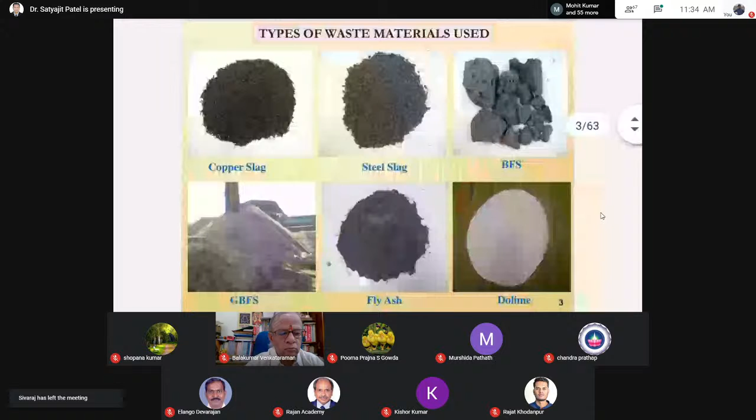The first one is copper slag. Copper slag is a byproduct from the copper industry, generated when copper ore is refined to copper metal. So in that copper industry you get the slag material. Whenever there is a process from mineral ore to metal, there will always be some slag. Similarly, steel slag is an electric arc furnace slag. The copper slag is procured from Birla Copper at Dahej in Gujarat, and the steel slag is procured from Essar Steel in Hazira, Surat.

In steel slag, there are two types of slag available in steel plants. One is, in the first step, it produces blast furnace slag, BFS. When iron ore is converted into molten iron, in that step blast furnace slag is produced. Blast furnace slag can be of large size, like 40-50 mm or up to 80 mm also.

GBFS is granulated blast furnace slag. During the formation of blast furnace slag, it is pulverized into small pieces with the help of a high pressure water jet. Due to that, the large particles of blast furnace slag pulverize into smaller particles during formation, which is called granulated blast furnace slag, GBFS, of sand size similar to that of sand. The chemical composition is the same; only the physical characteristics differ between BFS and GBFS.

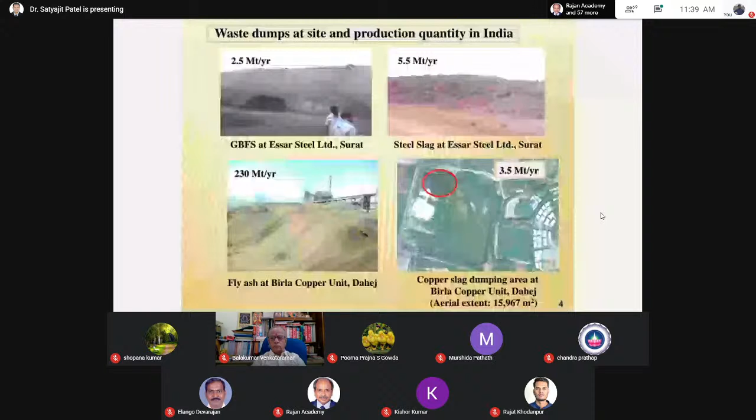The combination of waste materials studied here for the sub-base course: copper slag with fly ash as filler - that is copper slag fly ash mix; then GBFS with fly ash as filler - GBFS and fly ash mix; then fly ash stabilized with dolime, or you can stabilize with lime; then black cotton soil stabilized with dolime. These four materials can be selected as sub-base material.

For the base course: copper slag with fly ash filler stabilized with dolime; fine steel slag with fly ash filler stabilized with dolime; coarse steel slag with fly ash and dolime; blast furnace slag with fly ash and dolime. These four materials have been selected as the base material.

So what is the difference between these two compositions? For sub-base, there are only two raw materials - one is the slag, your hard material, and the other is the filler or binder. But for the base course, there are three materials: the strong hard material like slag, then filler like fly ash as a pozzolanic material, and binder as dolime.

For base material, we need higher strength, higher compressive strength, or higher CBR value for the road pavement, and for sub-base we need low strength. So accordingly, the material has been selected to fulfill the requirement of base as well as sub-base material.

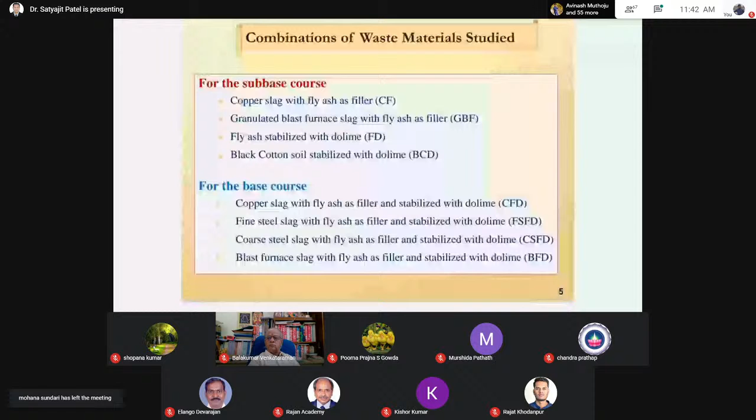The objective is technical competence - whether these materials are feasible and their strength fulfills the requirement as per IRC code for use in road pavement - and sustainability, from an economic point of view, based on the quantity of waste material to be used, how it is sustainable.

Then a pavement model test has been carried out, followed by finite element analysis using Plaxis 3D for the road pavements. Then design to find out the equivalent thickness of this material - how much thickness you have to take which is equivalent to conventional stone aggregate.

So as per IRC code recommendations, you need 250 mm of wet mix macadam for the base layer, and around 330 to 350 mm of sub-base layer for CBR equal to 3% and traffic of 100 MSA. So the question is how much thickness of waste material, that is stabilized material, is equivalent to 250 mm WMM, or how much thickness of sub-base material consisting of waste material is equivalent to 350 mm of GSB.

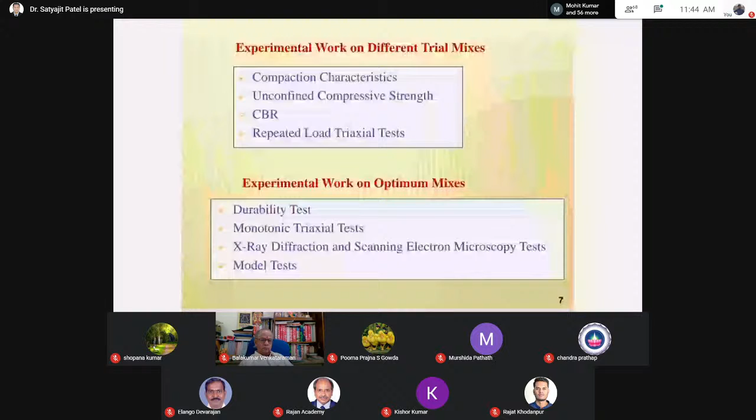Then experimental work was carried out, starting with the basic heavy compaction test. Then unconfined compressive strength test, as this is a cemented base and cemented sub-base material, so UCS is always preferable and convenient to compare the various mixes, curing periods, and so on. It is easy to prepare the specimen and conduct a large number of UCS tests. Then CBR has been carried out only for sub-base material, because only for sub-base material do you need the CBR value to check its feasibility. UCS is useful for any cemented material, whether for sub-base, base, or anything else.

Then repeated load triaxial test, or cyclic triaxial test, was carried out to find out the resilient modulus and permanent deformation of the various mixes. Based on these four tests, the optimum mix was selected, and on the optimum mix, durability tests were carried out, that is wetting-drying cycles. Then monotonic triaxial test was done to find out cohesion and angle of friction, useful for numerical analysis in Plaxis.

Then X-ray diffraction and scanning electron microscope tests were carried out to study its microstructural behavior. Then a pavement model test was also carried out.

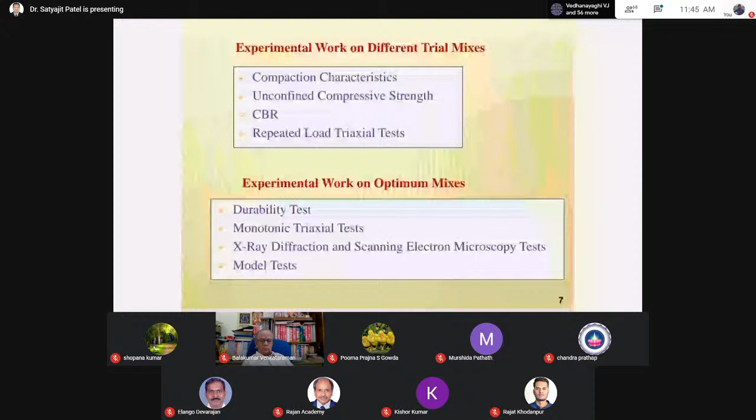So, the different trial mixes adopted for sub-base material: what is the mix proportion adopted for the research investigation. That is the copper slag fly ash mix, where copper slag was replaced by different percentages of fly ash, ranging from 10 to 40% of fly ash by weight.

Then the GBFS fly ash mix, where GBFS, that is granulated blast furnace slag, was replaced by different percentages, that is 100%, 90%, 80%, 70%, 60% of fly ash by weight. As GBFS is a costly material, it has some value-added product status because it is largely used in cement plants.

So GBFS will not be available to you free of cost; it has some value. That's why effort has been made to minimize the use of GBFS. So the replacement means only fly ash, then 90%, 80%, 70%, 60% replacement of GBFS with fly ash.

Then the fly ash dolime mix, fly ash with different percentages of dolime, say 5, 10, 15, 20% dolime. If you use lime instead, in the fly ash lime mix, you can take 3, 6, 9, 12% of lime, because lime contains calcium oxide of around 70-80%. In case of dolime, you need a higher percentage due to its impure quality.

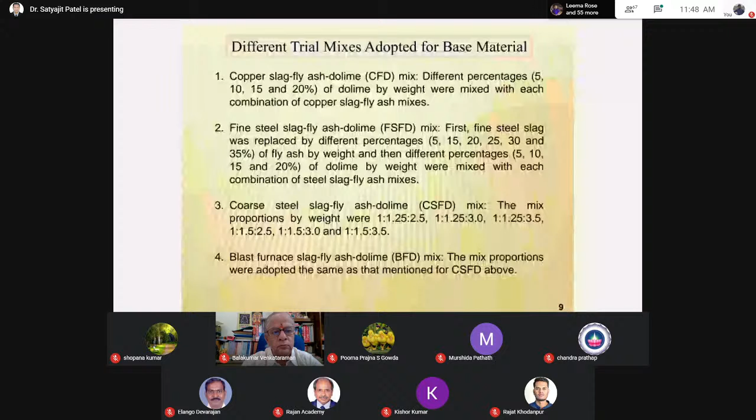Similarly, for steel slag, fly ash has been added or replaced at 5, 15, 20, 25, 30 and 35% to fine steel slag. Then different percentages of dolime, 5, 10, 15, 20%, have been added.

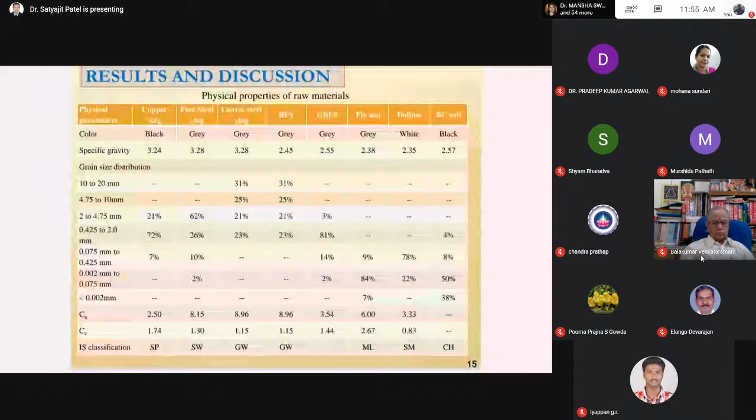Similarly, for coarse material, properties like specific gravity and grain size are easily determined in the laboratory. Copper slag is material passing through 4.75 mm, so it is always less than 4.75 mm. For coarse steel slag and blast furnace slag, particle size up to 20 mm is used in this laboratory test, because in the laboratory you cannot prepare a cylindrical specimen for particle size more than 20 mm - you need a minimum diameter to particle size ratio of 5. But in the field, blast furnace slag and steel slag can be obtained up to 300 mm or 500 mm diameter, very large sizes that need to be crushed down into smaller ones.

If you compare with the requirement of IRC, for a cemented material to be used in the base layer, IRC recommends a minimum UCS value of around 4.5 MPa. Minimum 4.5 MPa UCS value should be there in the laboratory, 4.5 to 5 MPa should be there.

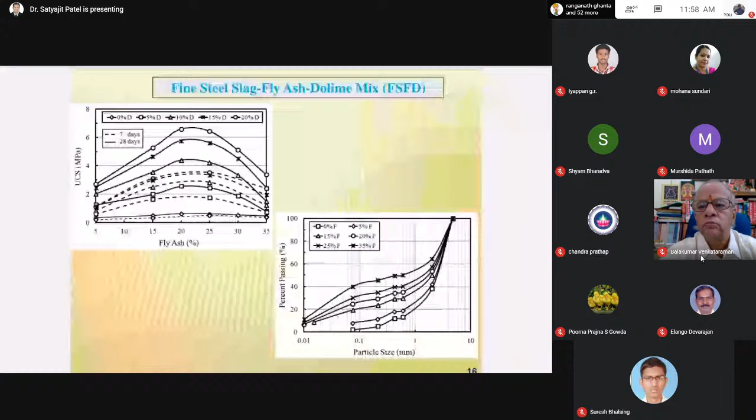Geotechnical inputs for pavement design. What are the various parameters you need for a proper pavement design?

The first one is resilient modulus. What is resilient modulus? The elastic modulus of a material, the simple Young's elastic modulus, which we find out from the triaxial test, the monotonic triaxial test in the laboratory. The elastic modulus of a material is the stress divided by strain for a slowly applied load, whereas resilient modulus is the stress divided by strain for a rapidly applied load, such as those which actually occur in pavement.

In road pavement, there is no static load or monotonic load. All the load from vehicle movements will be repeated in nature, or you can call it cyclic load or repeated load at different frequency. So Young's elastic modulus is stress by strain for a monotonic load, but resilient modulus is the same thing, stress by strain for repeated load.

So CBR test, plate load test, UCS test, static triaxial test, all these tests determine the behavior of pavement material under slowly applied load or monotonic load conditions only, which is unable to simulate field conditions properly, because in the field there is no monotonic load, there is repeated load. So resilient modulus and permanent deformations are two important material properties for characterization of pavement material and design of the pavement structure.

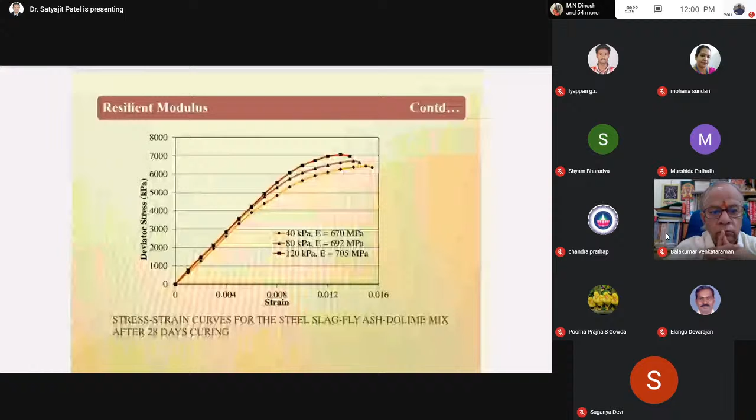When there are a number of repeated loads, you will get the resilient modulus for each load cycle. It is defined as the ratio of cyclic axial stress to the recoverable resilient strain in a repeated dynamic loading. The permanent strain is an indicator of the rutting potential of the material.

For a material, if the permanent strain or permanent deformation is more, its rutting potential will be more. So there is a major chance for that material to fail by rutting.

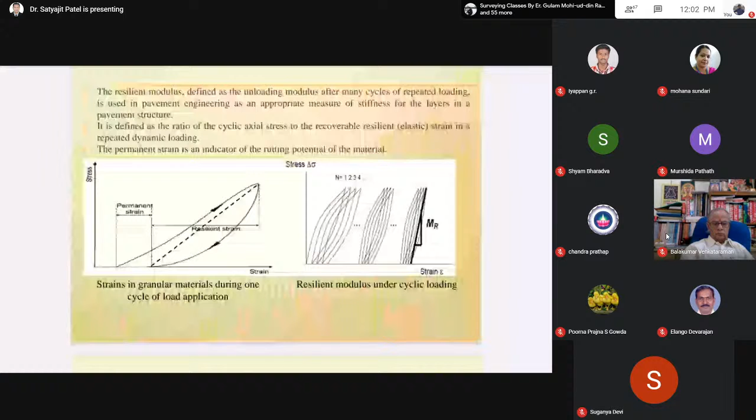Both resilient modulus and elastic modulus are measures of stiffness of the material, but elastic modulus is useful for monotonic load, while resilient modulus gives the stiffness under repeated loading condition. This resilient modulus is very useful while designing the pavement using mechanistic empirical pavement design or IIT PAVE analysis. So instead of elastic modulus, it is better to use resilient modulus for pavement design.

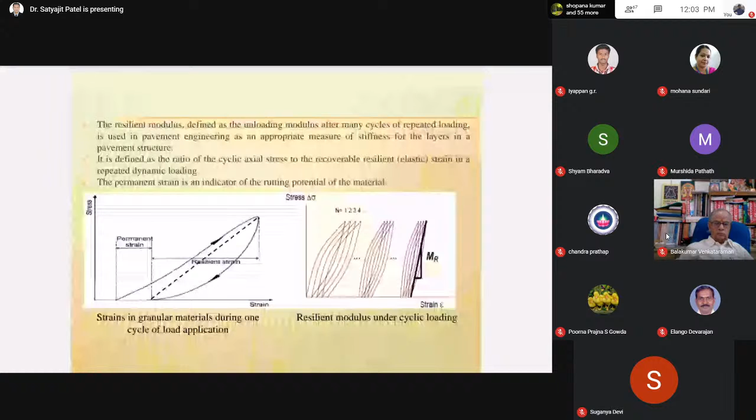It is desirable that resilient modulus and permanent strain of pavement material be determined by conducting a repeated triaxial test, but most organizations in India do not have the necessary facilities to conduct this test. In absence of testing facility, many state agencies and pavement designers use available empirical models to estimate or predict the resilient modulus and permanent strain.

There are many empirical equations available to predict resilient modulus using the CBR value, which is available in some IRC codes also.

The resilient modulus of a material is a stress-dependent measure of the elastic modulus. It is a function of both confining pressure and deviator stress, whereas elastic modulus is a function of confining pressure only. In case of Young's elastic modulus, for a given material and given confining pressure, it is constant. But resilient modulus depends on both sigma 3 and sigma d value.

With changing deviator stress or load applied on the specimen, the resilient modulus is different for different deviator stress. So it is not a constant quantity for a given material and a given confining pressure. This is a major difference between resilient modulus and elastic modulus.

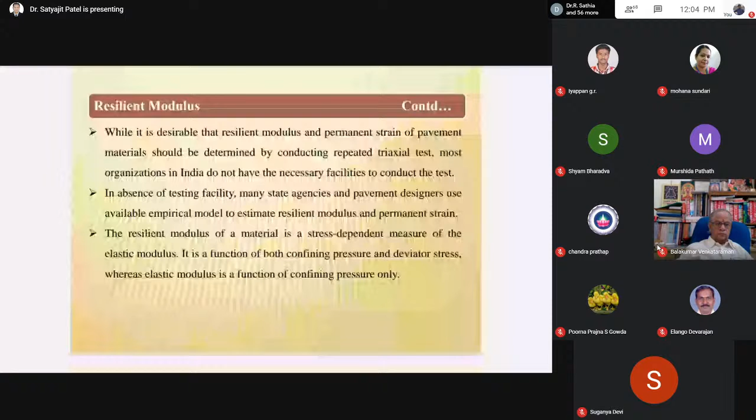There are so many correlations which, after carrying out the cyclic triaxial test, you can use to correlate the resilient modulus with different cell pressure and bulk stress, deviator stress. All these things I will explain after this table.

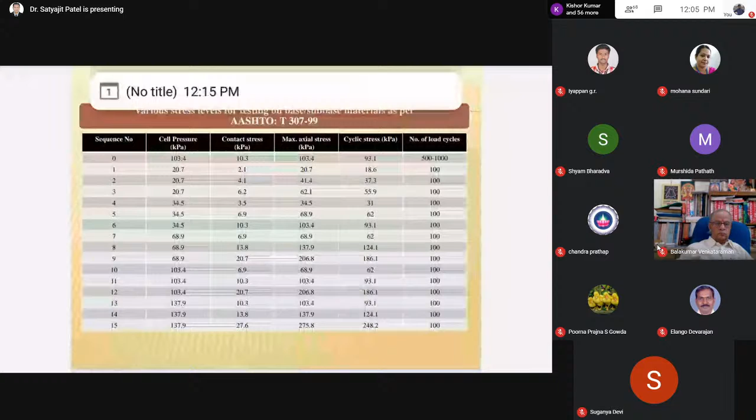The AASHTO T307 code recommends the test procedure for the resilient modulus test, how to obtain it or how to carry out this test. There are two such tables: one table is for base and subbase material, the other table is for subgrade material.

In this table, at sequence number 0, that is stress level number 0, then stress level sequence number 1 to 15. At sequence number 0, the cell pressure is 103, then contact stress, maximum stress and cyclic stress, where maximum stress minus contact stress is the cyclic deviator stress. This is the stress combination recommended by AASHTO to be applied for base and subbase material during the resilient modulus test.

At these 15 different stress combinations, you will get the resilient modulus value. As resilient modulus depends upon sigma 3 and sigma d value, for different combinations of sigma 3 and sigma d, we find the resilient modulus value.

The first stress level, sequence number 0, is called the conditioning phase, to stabilize the specimen or bring it to conditioning. At this cell pressure and deviator stress, around 500 to 1000 loading cycles are applied in the conditioning phase, after which the specimen gets stabilized, meaning its behavior becomes independent of the number of cycles.

It attains the resilient behavior. So after completion of this conditioning phase, or sequence number 0,

then we have to apply these 15 different combinations of stress levels from 1 to 15. So see the 15 different stress combinations. For the first 1 to 3, sigma 3 is constant with different deviator stress changing from 18, 37, 55.

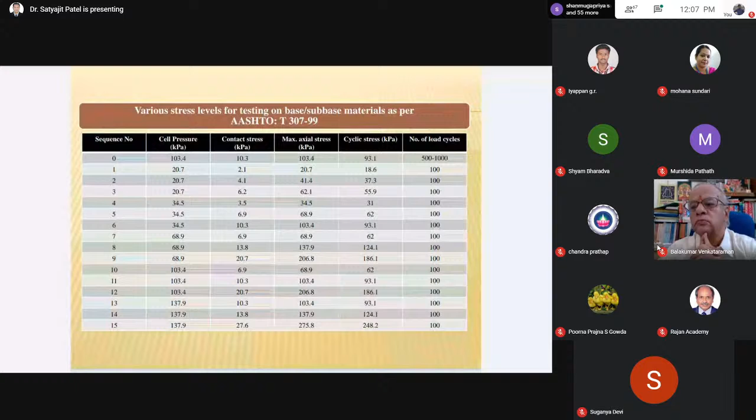for each stress level we have to apply 100 number of load cycles, to get the resilient modulus for different stress combinations. So from this test, during the conditioning phase, we will get the permanent strain behavior, and in stress levels 1 to 15, we will get the resilient modulus value for 15 different combinations.

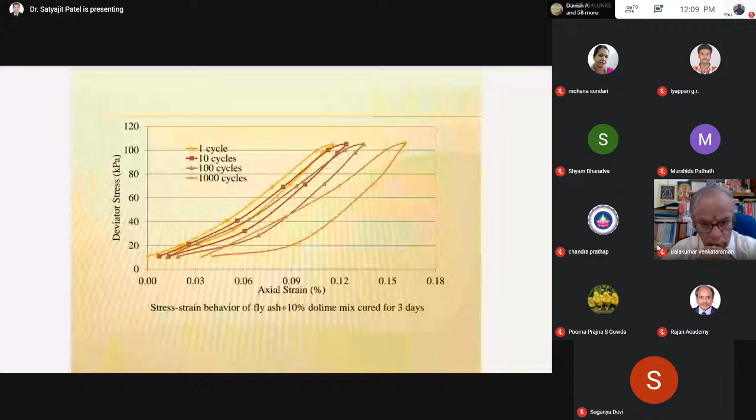So with increasing number of cycles, the permanent strain is increasing. See here, with increasing number of cycles, the permanent strain is increasing. Say after 1000 cycles, the axial strain is around how much? Around 0.04. So after 1000 cycles, you will obtain the axial strain or permanent strain as 0.04.

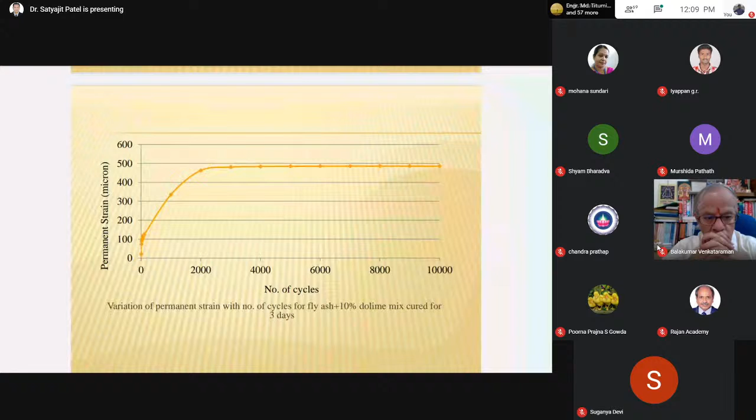So similarly, if you plot the permanent strain with number of cycles, initially it increases very rapidly. After the 1000 or 2000 loading cycles, depending upon the type of material, the permanent strain gets stabilized. This figure can be obtained in sequence number 0, or the conditioning phase, during the test. So after the permanent strain gets stabilized, up to that point you have to apply the cyclic load in the conditioning phase.

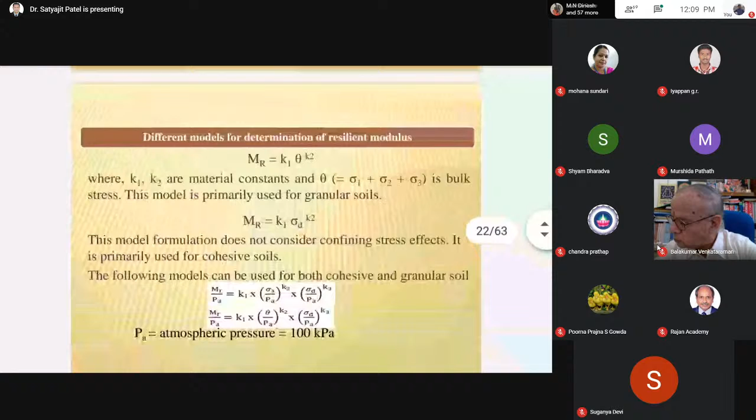Then, yes, so from this test we will obtain 15 different MR values for 15 different stress combinations. So from these 15 different MR values, now we can find out the material parameters, that is material constants, K1, K2, K3, like this.

So if you correlate the MR value with bulk stress theta, bulk stress is sigma 1 plus sigma 2 plus sigma 3, then you have 15 different combinations of MR and theta. So you will get the K1, K2 values from these correlations.

Similarly, if you correlate the MR value with deviator stress, MR equals K1 into sigma d to the power K2, you have 15 different combinations of MR and sigma d. From this, we can find out the K1, K2 values.

Similarly, instead of 2 parameters, we can use the 3 parameter model, where MR is correlated with both sigma 3 and sigma d, or MR is correlated with both bulk stress and sigma d. This is called the 3 parameter model because there are 3 different model parameters: K1, K2, K3.

So from these 15 different combinations, or 15 sets of MR and stress levels, we can find out these model parameters. So after getting these model parameters for a given material, if you know the K1, K2, K3 values, you can predict the MR value for any stress combination.

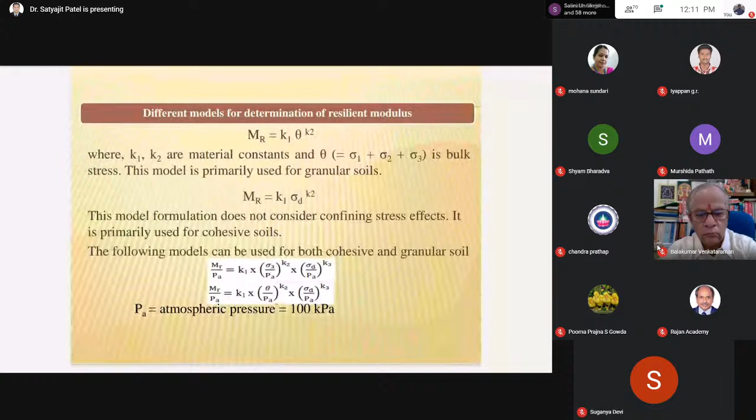So besides the 15 stress levels available, where MR value is available for those 15 stress levels, you can obtain the MR value for any stress level using these K1, K2, K3 values, which are a material property or constant for a given material.

So this has been obtained for the fine steel slag fly ash dolomite mixes. Similarly, the resilient modulus can be plotted with deviator stress. Then resilient modulus has been plotted with dolomite content. At higher dolomite content, you will get the higher resilient modulus.

Higher the binder content, higher will be its compressive strength, and higher will be its stiffness value.

Similarly, resilient modulus with deviator stress has been plotted here for different curing periods, that is FSFD, fine steel slag fly ash dolomite mix, for 0 days, 7 days, 14 days, 28 days curing period. So this MR value has also been compared with that of wet mix macadam, WMM. So if you see, the bottommost line indicates WMM, which is a very low value as compared to the cemented base material.

So the MR value obtained for this steel slag fly ash dolomite mix, even for 0 day curing, is more than that of WMM, because WMM is an unbound material. WMM is an unbound material, so in the laboratory you will get a very low strength or stiffness.

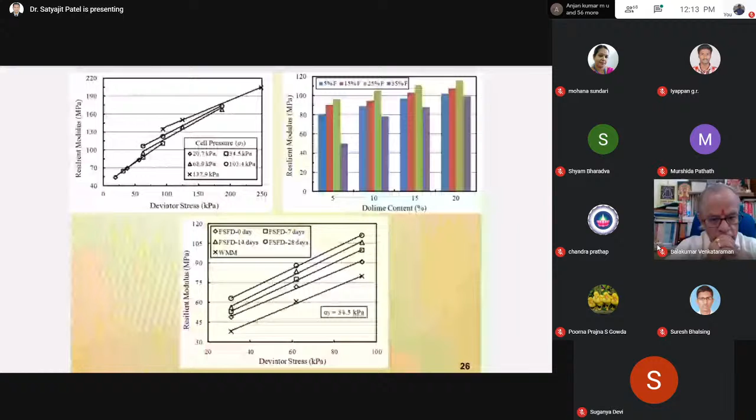So, modeling of resilient modulus. For this waste material, three models have been analyzed to determine which fits best for this given waste material, so that we can study it. Model 1, 2, and 3 have been compared in terms of performance of these three stress-dependent models for this waste material.

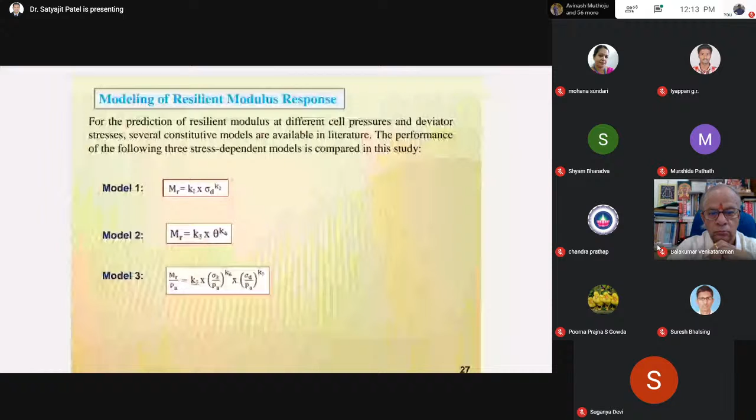After comparison, it was found that for the first model, the MR-sigma D model, the R square value obtained is 0.972, that is the coefficient of correlation, and the residual sum of square RSS value obtained is 12,660. So which model gives the best result? When the R square value is highest and RSS value is lowest, that gives the best model. In this case, the 3 parameter model gives the best result, with the highest R square value and lowest RSS value.

The 3 parameter model explains or demonstrates the effect of sigma 3 and sigma D separately. The first model did not consider the effect of sigma 3, but in the 3 parameter model, the effect of sigma 3 and sigma D has been clearly separated by the parameters K6 and K7. So from this study, it has been concluded that the 3 parameter model fits best for predicting the resilient modulus for this cemented base material.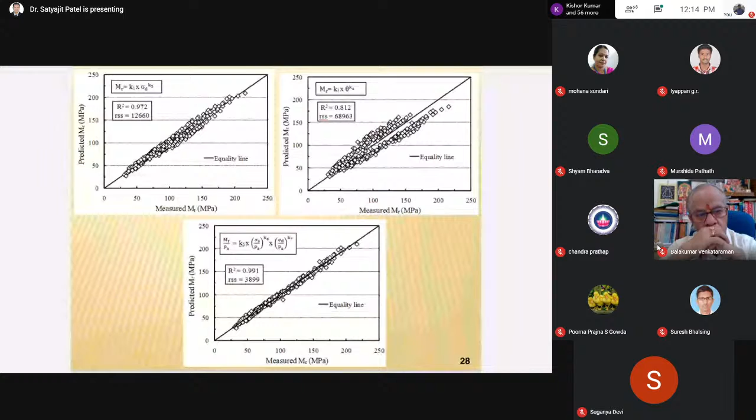For different materials like steel slag, fly ash, and dolime at 1 day, this is the X-ray diffraction peak intensity. From the XRD test, I compared the XRD peak intensity of different mixes and different curing periods, looking at different minerals or compounds such as calcium hydroxide, calcium carbonate, alumina, silica, ettringite, and CASH gel, calcium alumina silicate hydrate. This binding gel is responsible for the strength gain or increase in stiffness of the material.

Based on this X-ray peak intensity, we can identify whether the optimum mix is giving higher gel formation or higher strength, and verify whatever we have obtained regarding the UCS value and resilient modulus value, with the help of microstructure study.

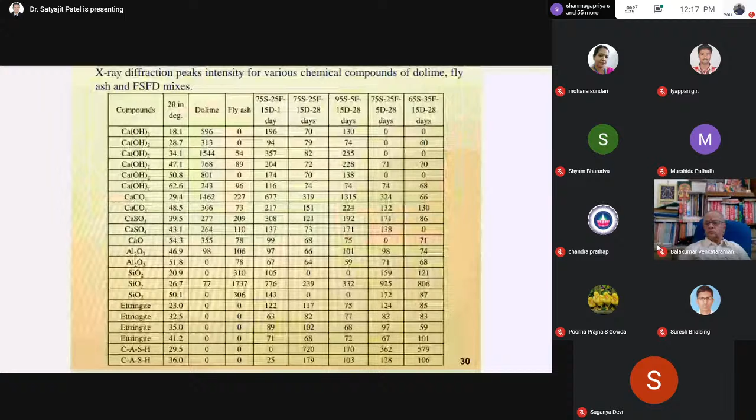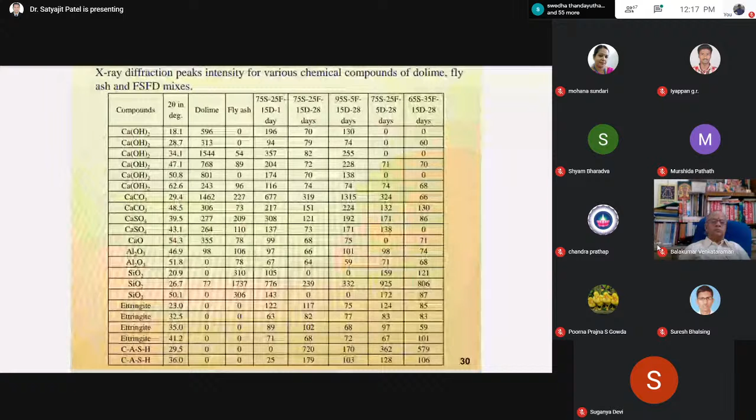In the case of 28-day curing period, if you compare 75% steel slag, 25% fly ash and 15% dolime, for both 28 days and 1 day, comparing the 1-day and 28-day strength, you get the CSH gel. At 1 day, CSH gel at this diffraction angle is 0 here and 25 there, which has increased to 720 and 179. This indicates that with increase in curing period, the gel formation has increased. This can be ascertained from the X-ray peak intensity, and all these parameters can be confirmed from it.

These are a few photographs from the scanning electron microscope. The SEM figures are qualitative in nature; you cannot quantify anything here. If you compare the 1-day figure and 28-day figure, in the 1-day figure you will not get gel formation, only ettringite is present. In the 28-day figure, you will see the binding gel, the dense binding gel that binds the slag and fly ash particles.

So the optimum mix proportions adopted for the base course: similarly, for all materials, these tests were carried out, and based on this, the optimum mix adapted is 69.6% copper slag, 17.4% fly ash, and 13% dolime, which gives the best result with maximum values. Similarly, there are optimum mixes for fine steel slag, coarse steel slag, and blast furnace slag, giving the maximum UCS value and maximum resilient modulus value, fulfilling the strength requirement given by IRC 37 for use in the base layer of flexible pavement.

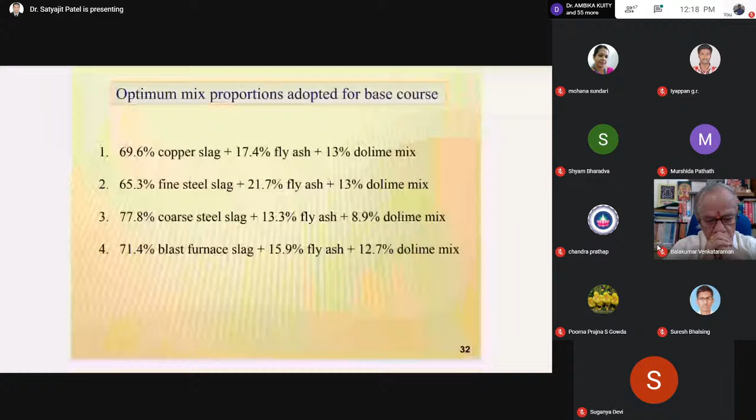So comparison of this optimum mixes with WMM. If you see here the comparison of this material, WMM is the bottommost. For WMM, that is deviator stress to cell pressure, and the cemented waste material has very high value of deviator stress or failure stress as compared to WMM.

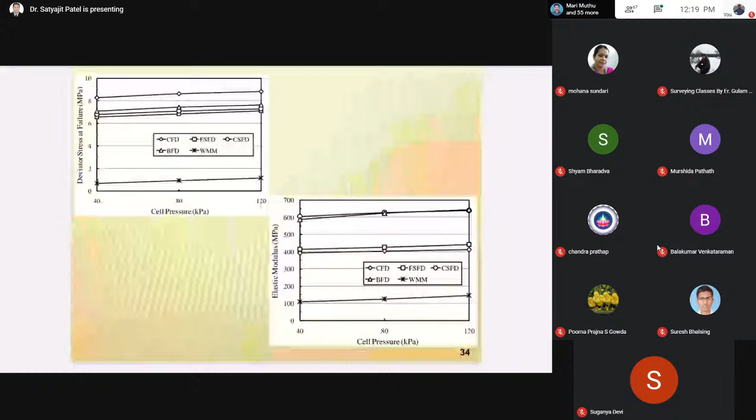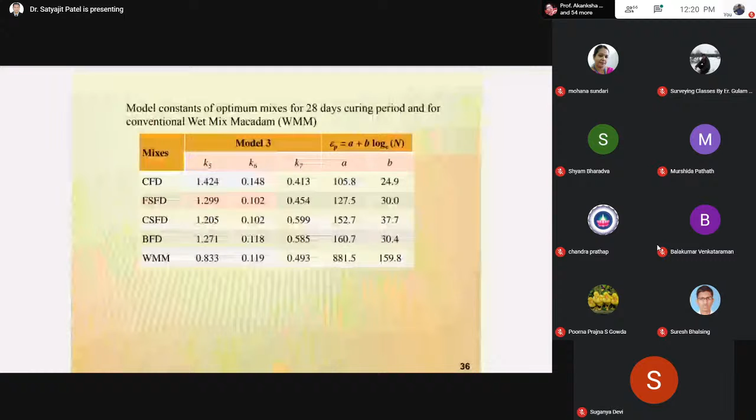Model parameter for the model 3 parameter model, the constant can be found out for different materials like CF, copper slag, and blast slag, WMM. So all this from the statistical analysis of the relative value of MR value for comparison of waste material.

The pavement test, from pavement model test. So the plate load test has been done on the pavement model, and the load carrying capacity of this cemented material has been compared with that of WMM. The dotted line indicates the model test result, the continuous line indicates the numerical analysis results. You see here all 4 waste materials have shown higher load carrying capacity as compared to WMM.

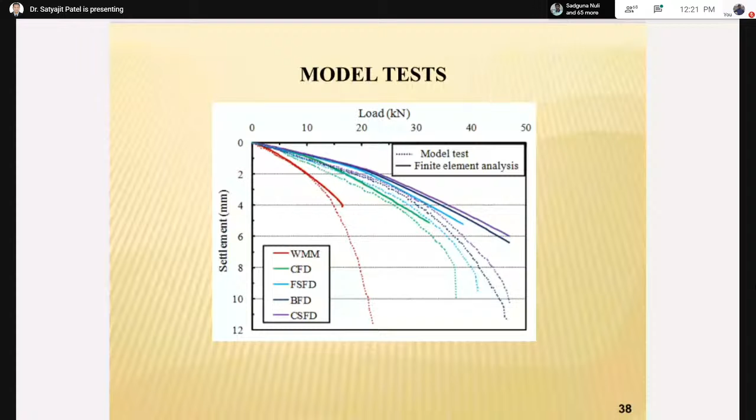So these are various parameters we use for this analysis, like for the Plaxis analysis you need the resilience modulus. So for the different waste materials, the resilience modulus has been used in the Plaxis analysis. Poisson's ratio has been taken as 0.35. The density of each material has been taken, and c and phi value has been taken for each material.

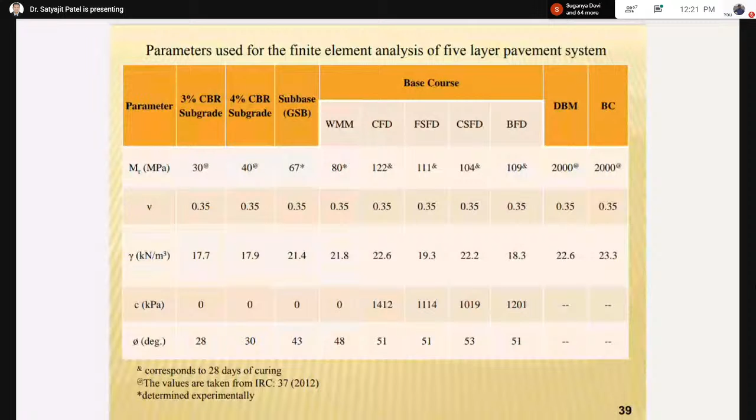So this is epsilon t1, that is your tensile strain obtained at the bottom of the bituminous layer. For that base layer thickness, same thickness, and for two different CBR values, 3% and 4%, the deformations at the top have been obtained, delta deformation at the pavement top, then fatigue failure criteria. So if you see here, the tensile strain obtained at the bottom of the bituminous layer has been observed from the Plaxis analysis, and accordingly the service life ratio has been obtained.

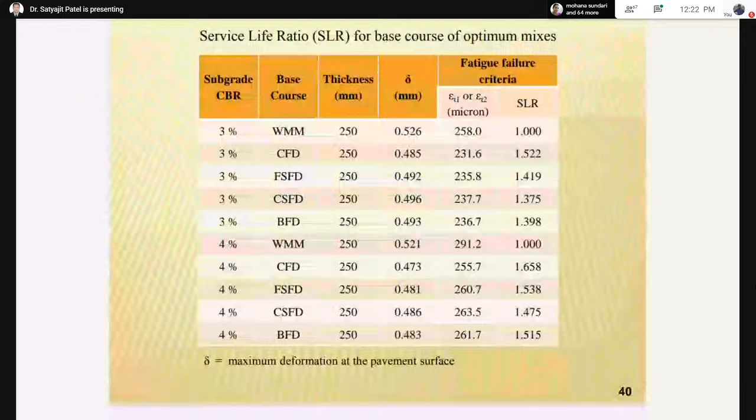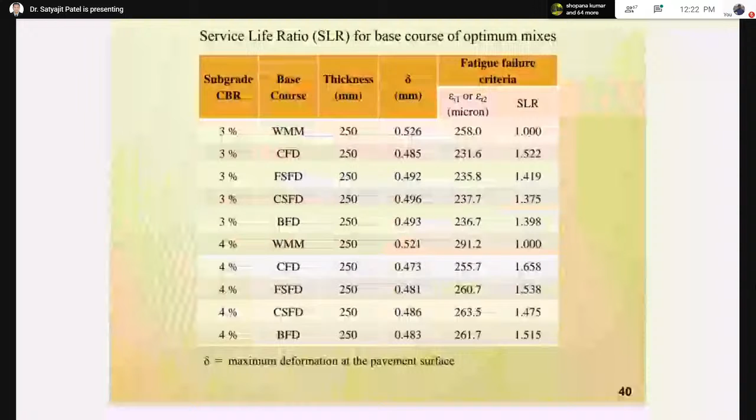So the service life ratio of 1.522 indicates that if your control pavement or conventional pavement is designed for 10 years, then this CFD material will last for over 15.2 years. That means its service life is 1.5 times that of conventional material. So the service life of any material can be determined with the help of this numerical analysis.

Similarly, based on the horizontal tensile strain shown in the previous table, if you plot with the base thickness, the top line indicates WMM, wet mix macadam. The bottom four lines correspond to the cemented waste material. So you can find out the equivalent thickness. That is, 250 mm of WMM is equivalent to how much? Around 100 mm of waste material.

So see the thickness difference. Due to this cemented base material having higher stiffness and higher strength, around 100 mm of this cemented waste material is equivalent to 250 mm of wet mix macadam. So see the thickness difference, there will be huge cost saving. This is based on the fatigue criteria. So all these conclusions are there, whatever we have discussed.

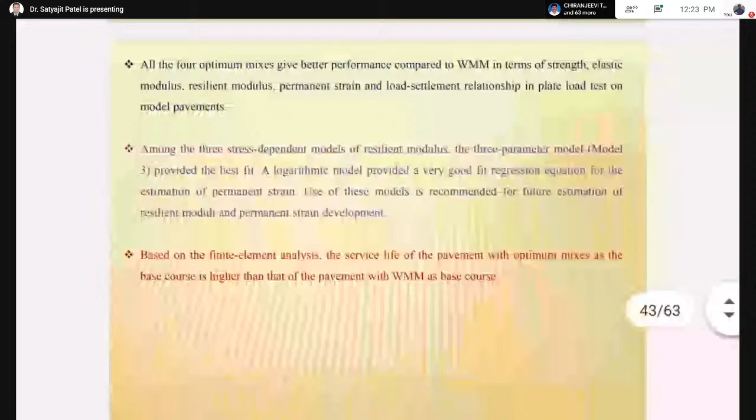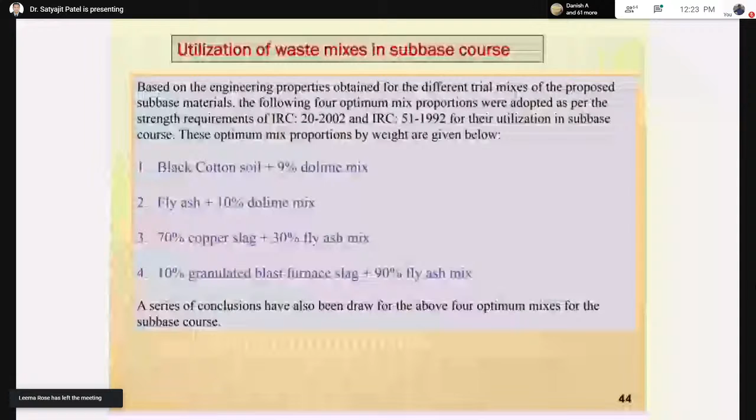So similarly, these are the optimum mixes which have been obtained for the subbase material. Out of these subbase layers, 4 materials: black cotton soil plus 9% dolime mix, fly ash plus 10% dolime mix, 70% copper slag plus 30% fly ash, then 10% GBFS plus 90% fly ash. These mixes satisfied the strength requirement or CBR requirement for a subbase material.

Now, pavement performance monitoring: how we can evaluate its field performance? There are two field equipment available. The first one is the falling weight deflectometer. See the figure, the deflection bowl. When you apply the load with that loading plate of diameter 30 centimeters, which is same as that of the wheel diameter or tire pressure.

So when you apply the load, the deformations will be there up to some distance. If you measure these deformations at different distances, you will get this deflection bowl, and from this load-deformation curve, you will be able to find out the stiffness or elastic modulus of all 5 layers of the pavement, based on the simple Burmister theory. So from this instrument, the load is applied at the loading plate, and the deformations are measured with the help of a geophone at different distances.

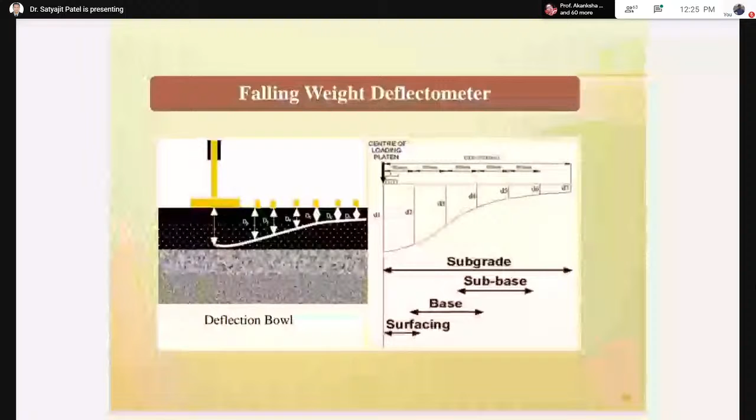From this we obtain the stiffness or elastic modulus, that is the dynamic modulus, because dynamic loads or repeated loads are being applied, not a static load. So whatever modulus you obtain is the dynamic modulus, which can be correlated to resilient modulus also in the field.

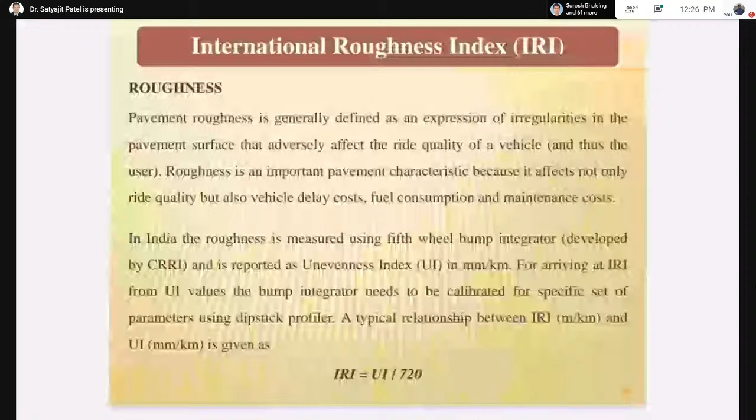Then the second instrument is the International Roughness Index. The first instrument, falling weight deflectometer, gives the structural performance, how to evaluate its strength or stiffness - that is structural evaluation. This instrument, the roughness index, gives the functional evaluation - how much the road is rough or smooth. So how to measure its roughness, that is also one of the important criteria.

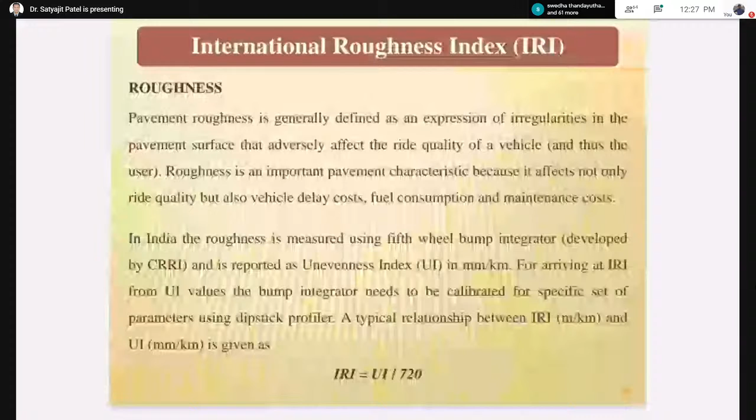Even if the road is of very good quality or very good stiffness, the smoothness should be up to the required limit. So to measure this roughness index or smoothness of the road, there is a parameter, International Roughness Index (IRI) value, that can be obtained. In India, roughness is measured using the fifth wheel bump integrator developed by CRRI New Delhi, which gives the unevenness index UI value in mm per kilometer. That is converted into International Roughness Index (IRI) equal to UI divided by 720.

From this instrument, when you tow it at a speed of 30 km per hour, a standard speed, this wheel will jump due to the unevenness on the road surface. During these jumps, it measures the height of humps or the unevenness during its travel, and per kilometer how much unevenness has been observed can be calculated.

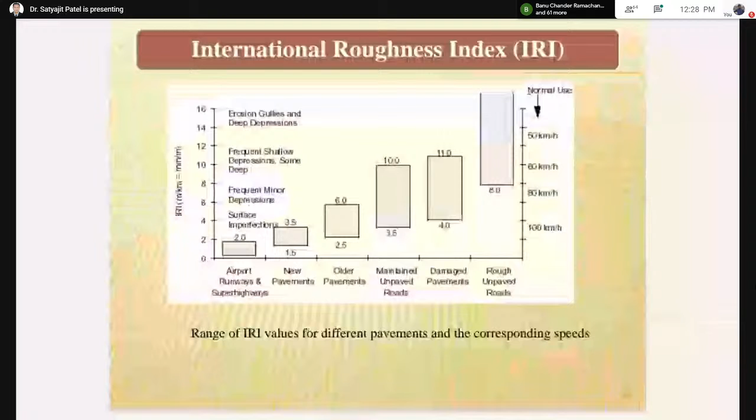So this is the bump integrator, from which roughness index can be calculated. For airport runway and superhighway, the roughness index should be less than 2, that is 2 meter per kilometer or 2 mm per meter. So per kilometer stretch, the total unevenness should be less than 2 meter, then it is called very good quality of pavement, like for airport and superhighway. Higher the roughness index, poorer is the quality of pavement.

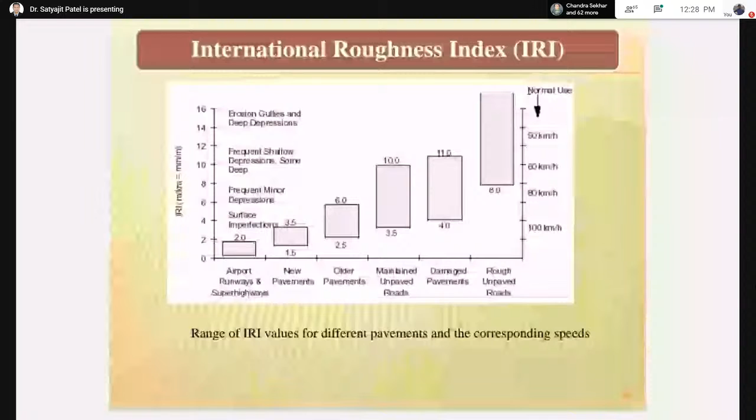Now, as a part of the DST project, we have used this optimum mix, whatever laboratory test has been carried out, as I have explained just now. Based on that laboratory test, this mix has been selected as the optimum mix for use in the field.

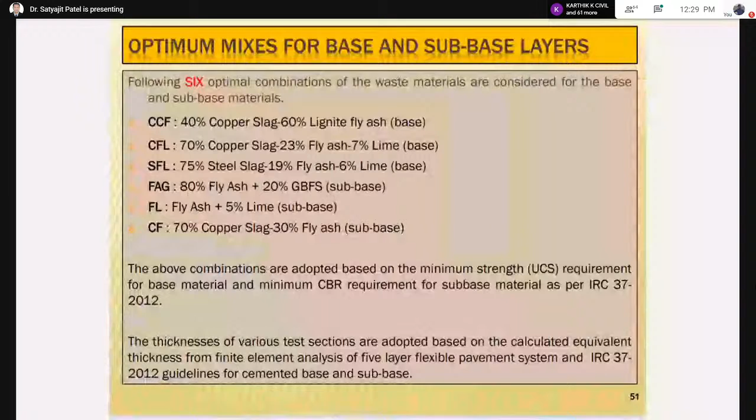Instead of dough lime, here we have used the lime obtained from the market. That is copper slag, CCF copper slag and lignite fly ash, then copper slag fly ash lime, steel slag fly ash lime as a base material, in sub base fly ash GBFS, fly ash lime, and copper slag fly ash. So three base materials, three sub base materials have been taken. All these optimum combinations satisfy the requirement of IRC 37 as a base and sub base material.

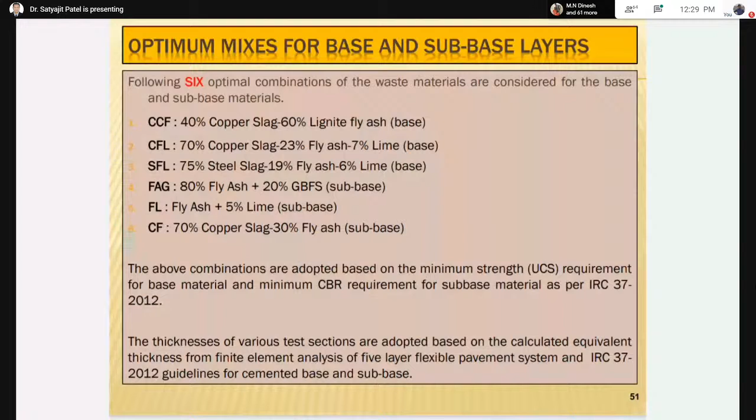So these are the constructed test sections.

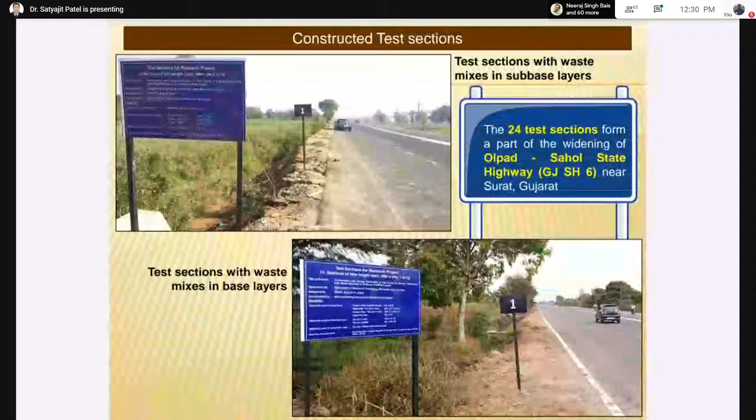This is regarding the field performance of this waste material, which is being used as a part of a state highway near Surat, Gujarat. Around 24 test sections have been formed from 6 materials - 3 materials for base, 3 materials for sub base. So 24 test sections have been prepared with different material and different thickness as a part of the Olpad Sahol State Highway near Surat. 2 stretches have been prepared - one stretch for different base material, another stretch for different sub base material, at 2 different locations nearby each other.

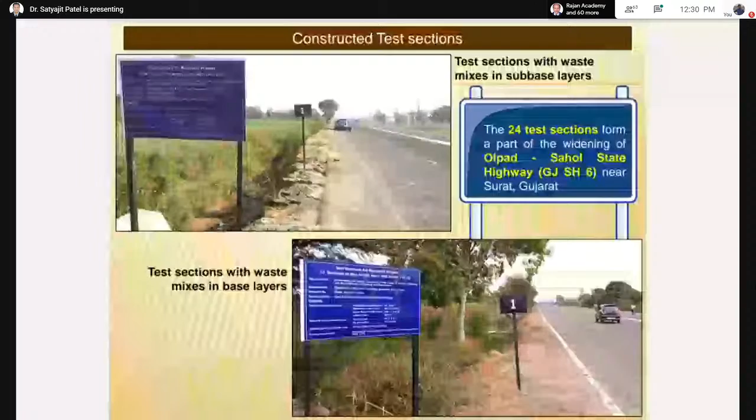These are simple photographs taken during the construction steps.

That soil of that road is black cotton soil, an expansive soil. The road thickness has been designed for a CBR of 4%. But black cotton soil has a CBR of only around 1.5 to 2%, so it has been improved by adding 50% fly ash with 50% native soil in the subgrade layer to obtain the designed CBR of 4%.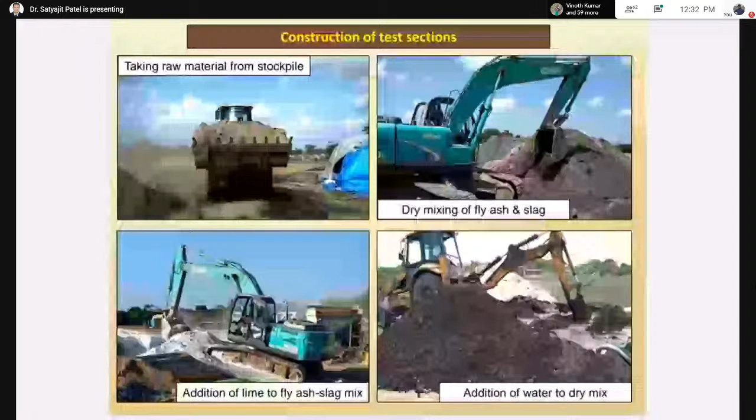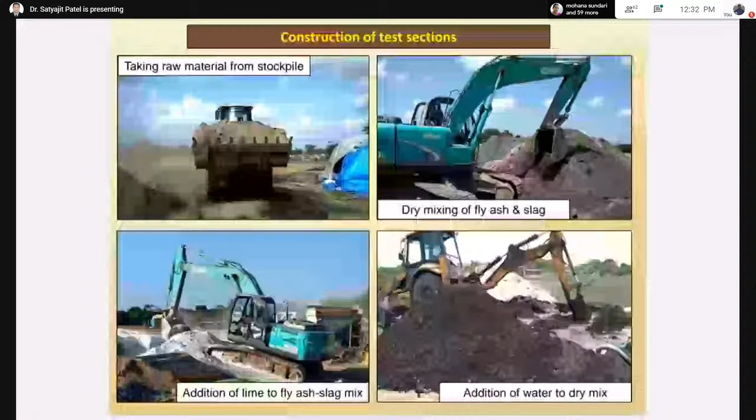Instead of manual mixing, we can use a concrete mixer or some other equipment to get a very good quality of homogeneous mixing. After dry mixing, you add water and mix properly in the wet condition also. After mixing, it is loaded into the truck and transported to the road, which is around 4 kilometers away from the mixing plant.

So it is spread and compacted to achieve the OMC and MDD. To study the leaching properties, we have laid a perforated PVC HDPE pipe, wrapped with non-woven geotextile, below the waste material.

So in the subbase and base layer, usually in the subbase layer because the base layer is the cemented one which is impervious. In the subbase layer, when copper slag flash or GBFS flash is used, which is unbound material, it has some permeability value. That's where we have kept the perforated HDPE pipe to collect any leachate produced inside the waste material. That leachate will also be tested for leaching of heavy metals if present.

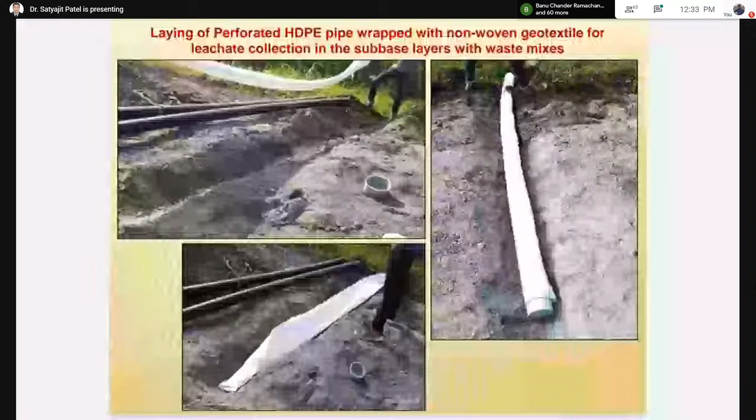These are some results of the FWD test. From the FWD test we obtain directly the elastic modulus of different layers, and also the peak deflection D0, which is obtained at the top of the pavement.

For different materials, different mixes, and different thicknesses, you can obtain the stiffness value. The stiffness has also been obtained for different load intensities, like 40 kN, 55 kN, and 70 kN load, applied through FWD in the field itself.

In the bottom figure, the back-calculated elastic modulus of different materials has been obtained like this: flash lime obtained 400 MPa elastic modulus from the FWD test, copper slag flash obtained 180, flash GBFS obtained around 210. GSB, the conventional stone layer or granular subbase material, has an elastic modulus of only around 105.

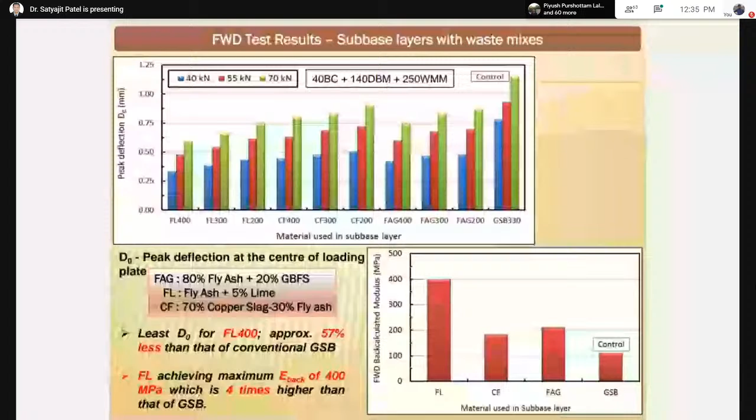This result is from the field test, which gives a more accurate result or the actual field condition. The D0 value is approximately 57% less than that of conventional GSB, and the elastic modulus of 400 MPa is 4 times higher than that of GSB material. So this cemented material has very high stiffness value or elastic modulus compared to the conventional one, giving low deflection at the top as compared to the conventional one, along with cost saving.

So this indicates how the cemented base and subbase is very economical and gives very good, or better, performance as compared to the control material.

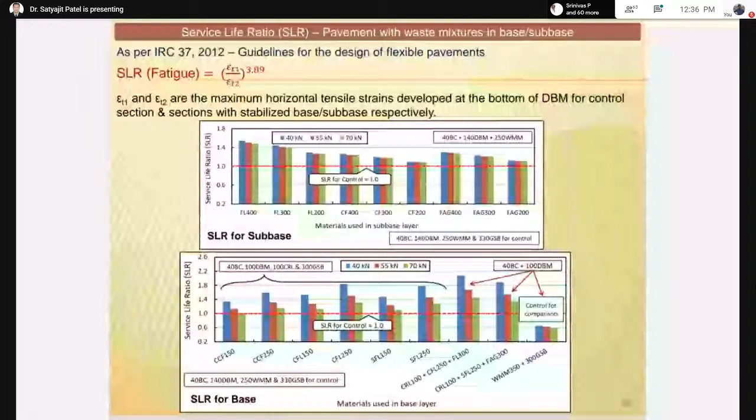Also, the cost saving will be discussed. So regarding the service life ratio, from this IRC 37 guideline, whatever equation is used for the laboratory MR value is used to find out the SLR value. The same equation has been used to find out the service life of this waste material compared to the control material. So whatever elastic modulus was obtained from the FWD, that elastic modulus can be used in the Plaxis analysis to obtain horizontal tensile strain or vertical compressive strain, from which the service life ratio has been obtained.

Service life ratio is 1 for the control material. With respect to that, the service life has been obtained up to a maximum of 1.5. So for different loading intensity and different material, the service life ratio indicates that all the waste materials have a service life of more than 1, meaning higher service life than the control material.

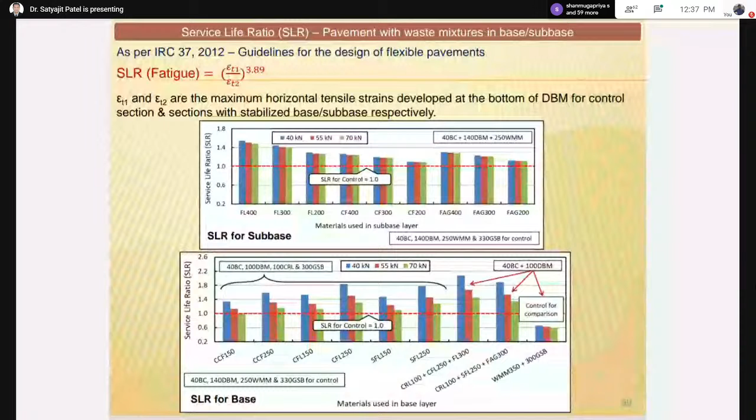So this is the service life ratio for subbase material. Similarly, service life ratio for base material. This service life is also compared with control material, which here is 350 mm WMM and 300 mm GSB. Even though the WMM is 350 and GSB is 300, the waste material of 150 mm gives a higher service life ratio compared to 350 mm WMM.

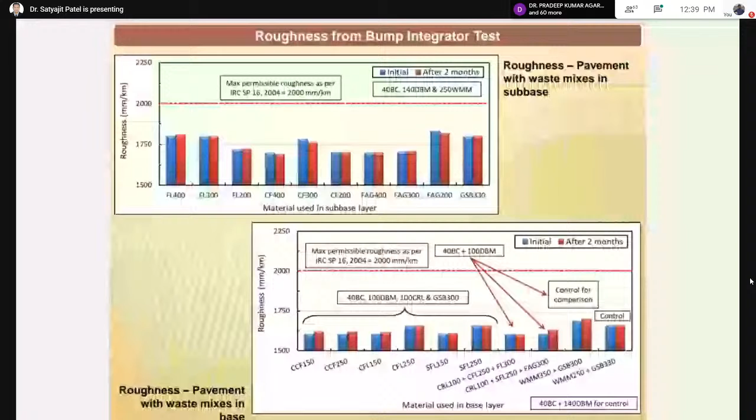So roughness index from the material for sub-base and base. This is regarding the roughness index after construction, after 2 months. This figure indicates the roughness index IRI value, which has been obtained in the range of around 1600 to 1800 mm per kilometer, while the limit is 2000 mm per kilometer for airport runway or super highway. So even after 2 months of construction, that value is quite low, around 1600 to 1800 mm per kilometer for all the waste materials.

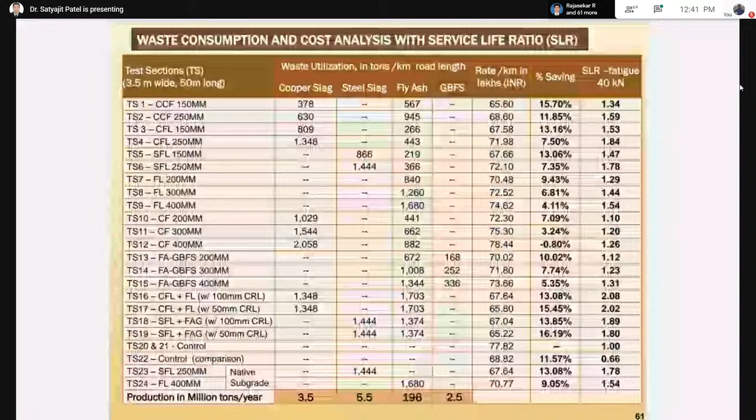These rates per cubic meter have been analyzed by taking different waste materials, different hauling distances, and material cost. The cost of waste material is not considered zero; it has some value, like copper slag at 50 rupees per ton plus GST, lignite fly ash at 120 rupees plus GST, plus transportation cost. So even with material and transportation costs included, there is still cost saving and a higher service life ratio.

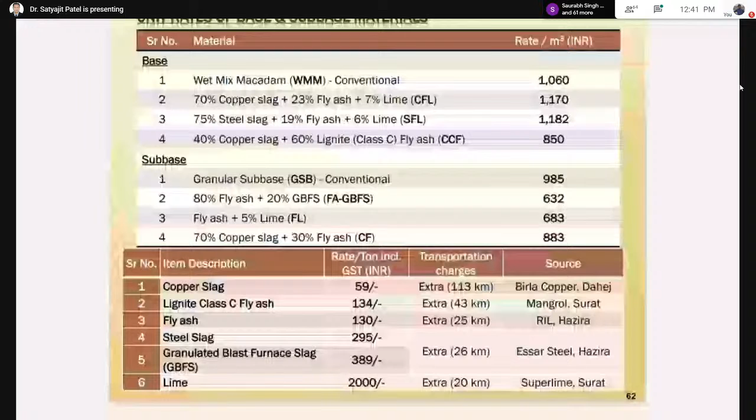So this is regarding the utilization of this waste material and its field evaluation. Thank you all.